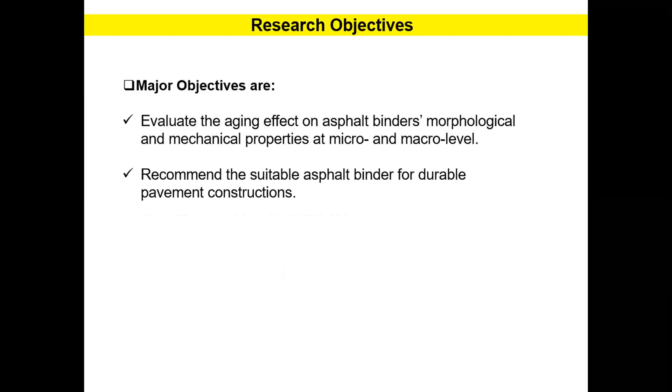is thermal cracking. However, it is also found that aging can change the rheological and mechanical as well as the chemical properties of the asphalt binders. So thus the major objectives of our study are to evaluate the aging effect on asphalt binders' morphological and mechanical properties at micro and macro level, and finally, recommend suitable asphalt binders for durable pavement construction.

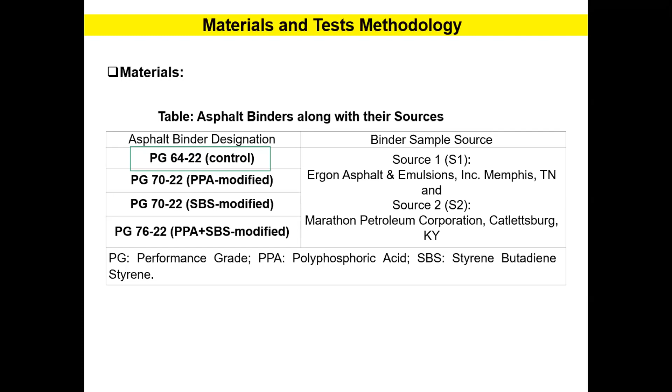In this study, 4 types of asphalt binder are used and evaluated in the laboratory, and these binders are collected from 2 different sources. We use the performance grade PG64-22 binder as a control, because this binder is widely used in the area of Arkansas, and the suppliers are certified by the Arkansas Department of Transportation. We also use the control binder along with its modified counterparts, modified with polyphosphoric acid, styrene-butadiene-styrene, and the combination of both PPA and SBS.

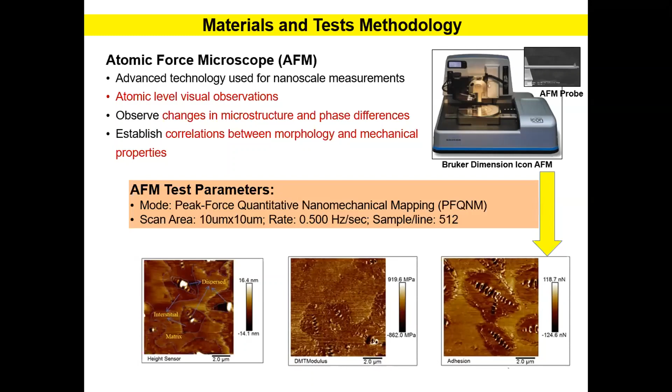In this study, we used an advanced technology for nanoscale measurement. We used an atomic force microscope to observe the asphalt binders' micromechanical properties along with their microscopic surface roughness. And we use the peak force quantitative nanomechanical mapping mode of AFM, where the scan area was 10 micrometer by 10 micrometer. Here you can see some typical AFM-based maps of height, which is roughness, DMT modulus, and adhesion value.

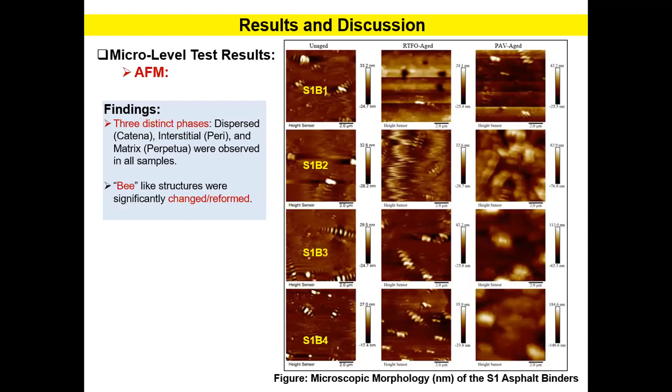So the micro level AFM test result shows that in all unaged asphalt binders, we found 3 distinct phases, which are called dispersed or catena, interstitial or peri, and matrix or perpetua. However, these phases were significantly changed, disappeared or reformed in case of short-term and long-term aging. Here you can see in the picture a typical AFM-based map of a source one asphalt binder. Also, the bee-like structures were significantly changed or reformed due to the aging of the asphalt binders.

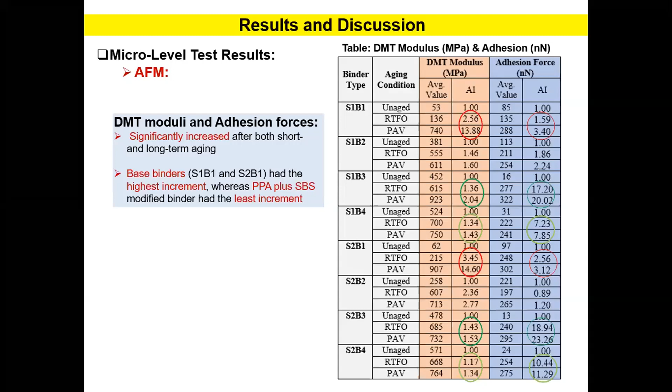However, there is a trend among all of the asphalt binders that regardless of their aging conditions and binder type, the DMT modulus and adhesion force values are increased due to both short-term and long-term aging.

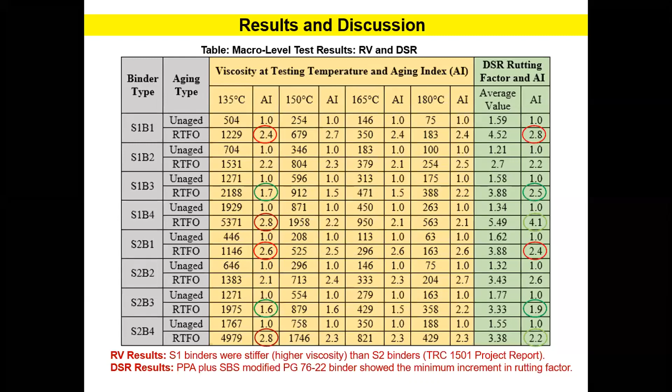So finally, based on the RV and DSR test results, it can be said that regardless of aging condition or binder types, asphalt binder becomes stiffer all the time with the increment of their aging condition, and the AFM result shows that the binder surface roughness significantly changes due to aging, which may affect its mechanical properties. Moreover, the DMT modulus values were significantly increased due to the concentration of polar matrix increment during aging, which leads to developing asphalt hardening.

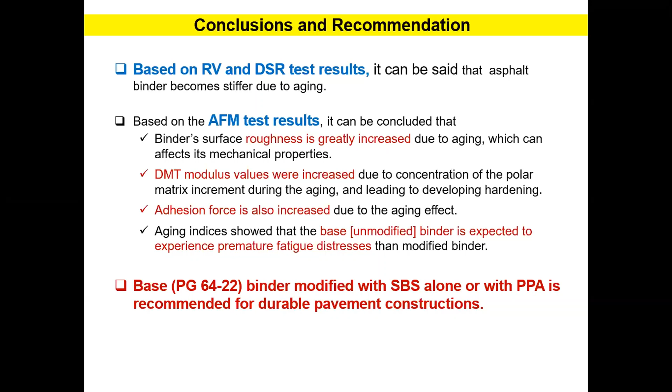Also, the adhesion force increased due to the aging effect. Moreover, the aging indices showed that the base binder is expected to experience premature fatigue distresses more than the modified binders evaluated in this study. Finally, it can be recommended that the base binder modified with SBS alone or with PPA can be used for durable pavement constructions.